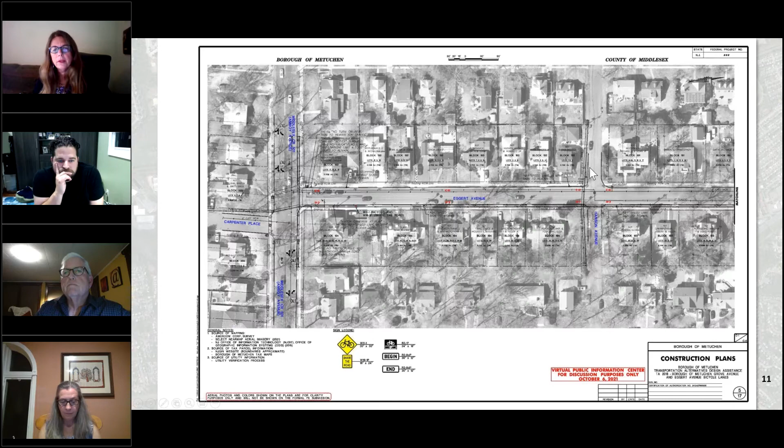Another two comments came in: we also have emergency vehicles traveling on Eggert Avenue and Grove—will Eggert Avenue be painted with bike lanes? No, on Eggert Avenue we couldn't fit that, which is what Mike had the drawing up for. So that's going to be what we're calling the sharrows, or pavement markings—there's not a dedicated bike lane along Eggert.

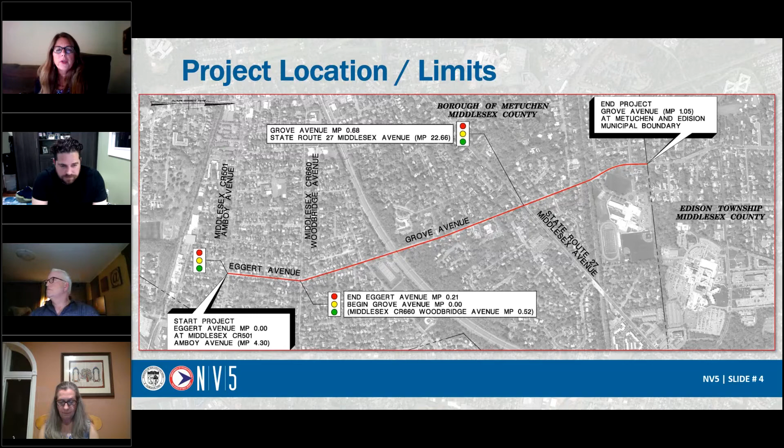On Eggert Avenue, the proposed improvements are going to be within the existing pavement. We're not proposing widening where we'd have to move curb and impact utilities and drainage, and potentially need right-of-way. What's proposed is shared lane markings within the travel lanes, to be installed on each side of the roadway. That image on the upper right is the type of pavement marking.

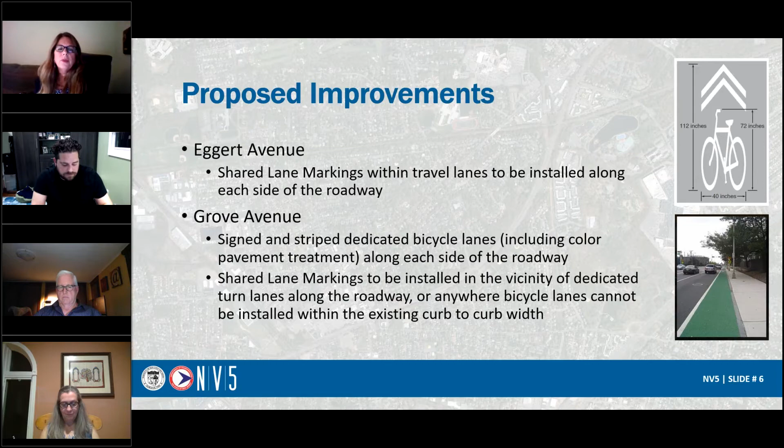Both of these types of treatments are really to alert road users that cyclists will be sharing the road, which is the image on the left, or, as we showed before, even the colored pavement.

Here, the image on the left is shared lane markings, which are proposed both along Eggert Avenue and areas of Grove Avenue. The image with the dimensions of the pavement markings is right from what's called the MUTCD, the Manual of Uniform Traffic Control Devices. The image on the right is showing actual pavement marking in this case on Woodbridge Avenue near Spear Street, just east of the Grove Avenue intersection.

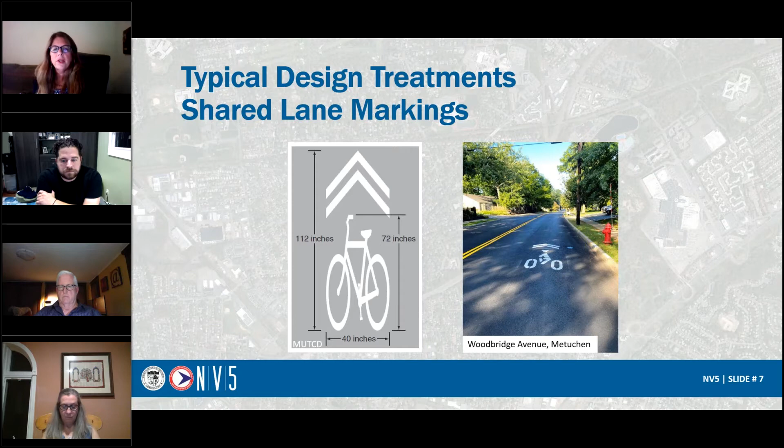This design treatment is just to show samples of bicycle lanes. The one on the left is Route 35 in Lavallette, New Jersey, and the one on the right is similar to what would be proposed here, which is actually a colored bike lane. Mike, maybe you could show with your cursor up by the car on the right — that pavement marking is actually within the colored pavement.

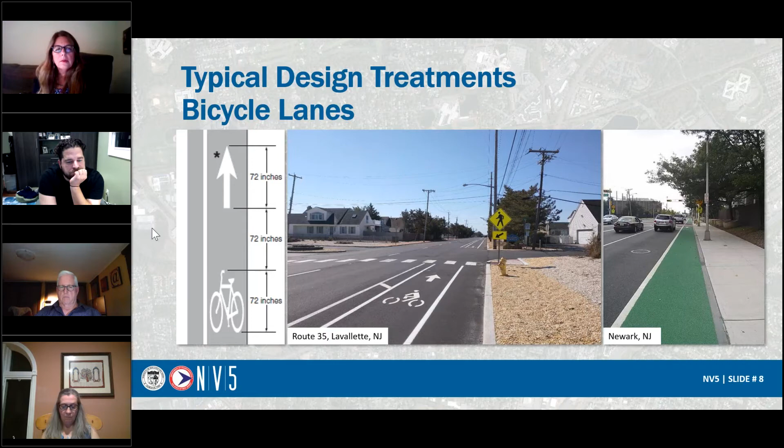At this time, I'm going to have Mike Keller actually go through our preliminary engineering progress print plans. These plans, the PDF of them, will also be posted on the website, and we'll just walk through the improvements on the plans before we continue the rest of our presentation.

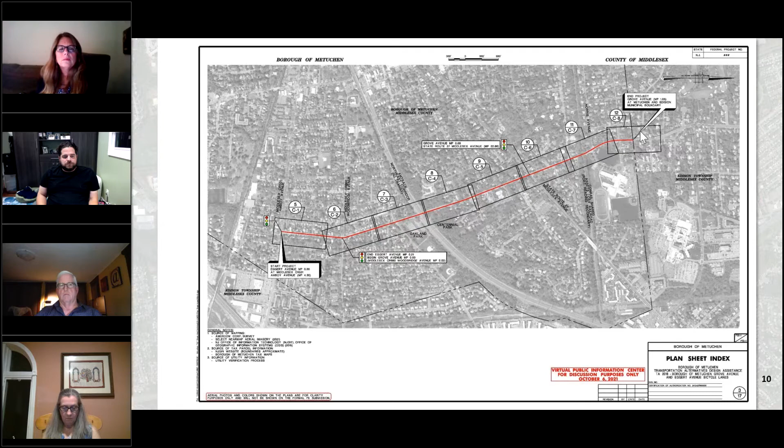Good evening, everyone. This sheet is the plan sheet index, and it shows the layout of the plan sheets within our project limits. So we start at Eggert Avenue and head along Grove Street, or Grove Avenue, up to the municipal border.

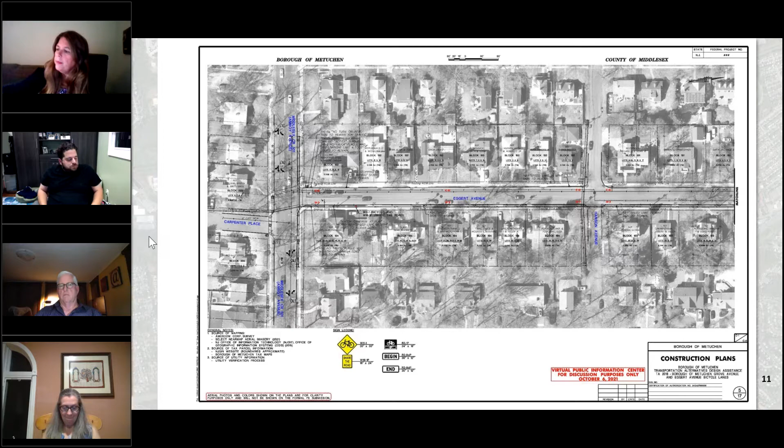For construction plan 1, this sheet includes the beginning of the project along Eggert Avenue, starting from Middlesex County Route 501 Amboy Avenue and heading north towards Hanson Avenue. The proposed improvements include shared lane markings, shown in red on the plan, due to the existing width of the roadway. Signage along each side of the road will be upgraded to include shared the road signs, shown in the lower left-hand corner of the screen. This project will be constructed within the roadway and the public right-of-way with no anticipated impacts to properties or existing utilities.

For construction plan 2, this sheet continues along Eggert Avenue towards the intersection with Middlesex County Route 660 Woodbridge Avenue and the start of Grove Avenue heading towards New York Avenue. The proposed shared lane markings continue up to and through the intersection due to the existing width and the presence of dedicated turn lanes on Grove Avenue. Following the intersection, the proposed improvements include 5-foot wide dedicated bicycle lanes with color pavement treatments, shown in green and red on the plan.

For construction plan 3, this sheet continues from an area north of New York Avenue, past Oakland Park, and heading towards the Amtrak Railroad overpass. The dedicated bike lanes and colored pavement treatments continue.

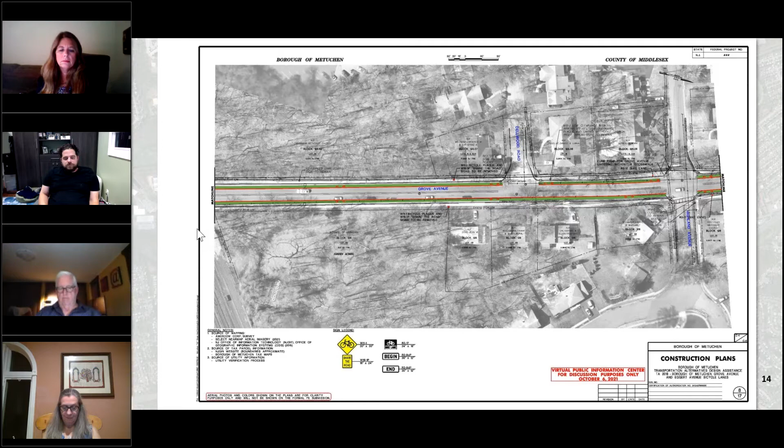For sheet 4, this sheet continues from the Amtrak overpass heading towards Highland Avenue, and the dedicated bike lanes and colored pavement treatments continue.

On sheet 5, this sheet continues from north of Highland Avenue, heading towards Woodside Avenue. The dedicated bike lanes and color pavement treatments continue. Due to the presence of a curb bump out at the corner of Grove Avenue and Woodside Avenue, right here, we're proposing to restripe the existing double yellow center line stripes so the proposed bike lanes can maintain a minimum of 5 feet width in the area.

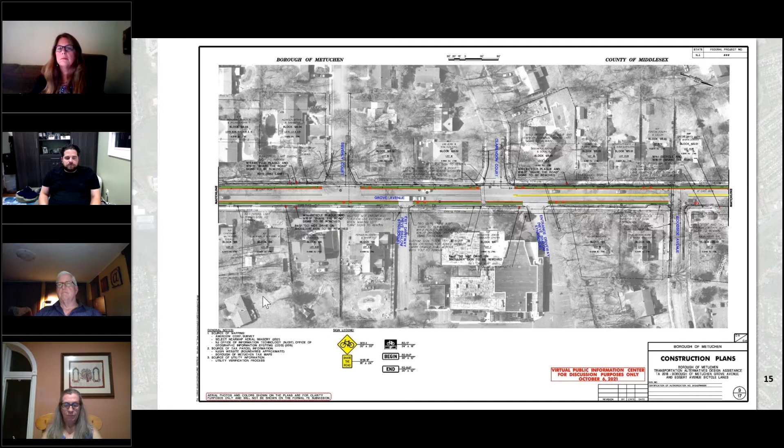Following Woodside Avenue as Grove Avenue approaches Route 27, Middlesex Avenue, the bike lanes heading north end due to the presence of dedicated turn lanes at the intersection, where the yellow shared lane marking symbols begin.

For this sheet at Route 27 and Middlesex Avenue, heading towards Stoneham Place, as previously noted on the last slide, due to the presence of the dedicated turn lanes on Grove Avenue for Middlesex Avenue, the dedicated bike lanes and shared lane markings are proposed. Following the intersection, the dedicated bike lanes continue heading north.

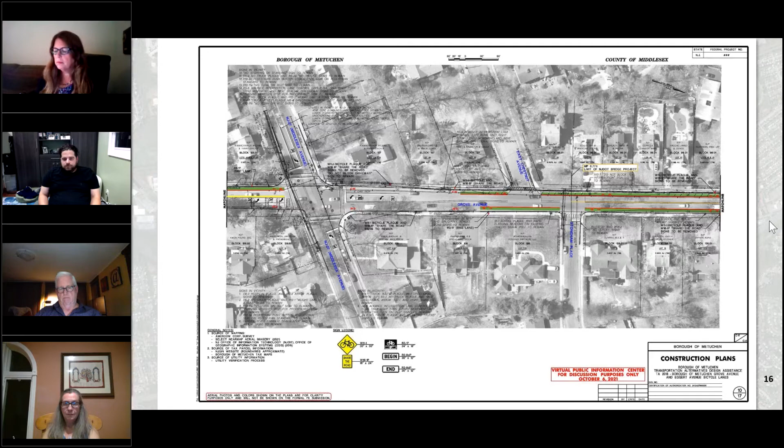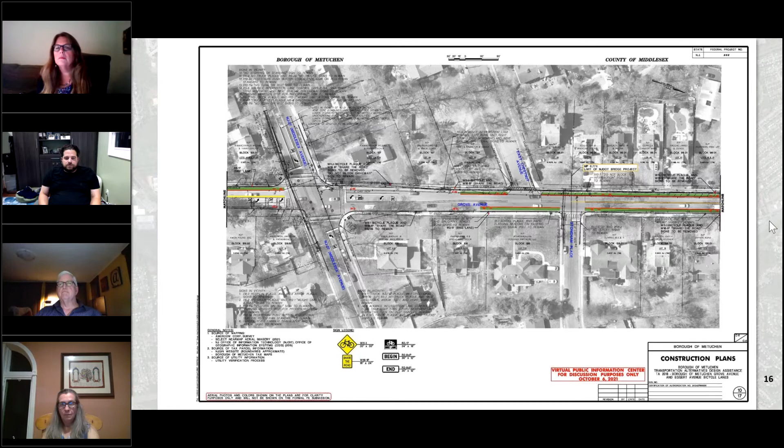As for Stoneham Place heading towards the Conrail Railroad Bridge, a separate NJDOT project is present within the project limits from Stoneham Place to north of the Middlesex High School, or Metuchen High School, parking lot at milepost 0.99. This includes a bridge replacement project for Conrail, Port Reading Secondary Railroad, and we are in coordination with NJDOT for the project.

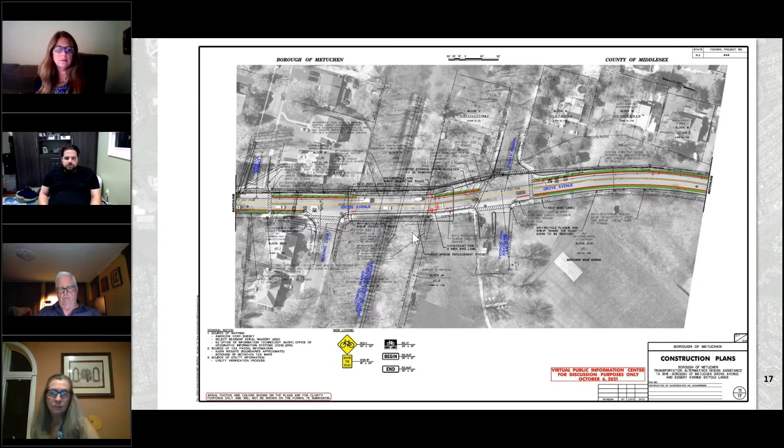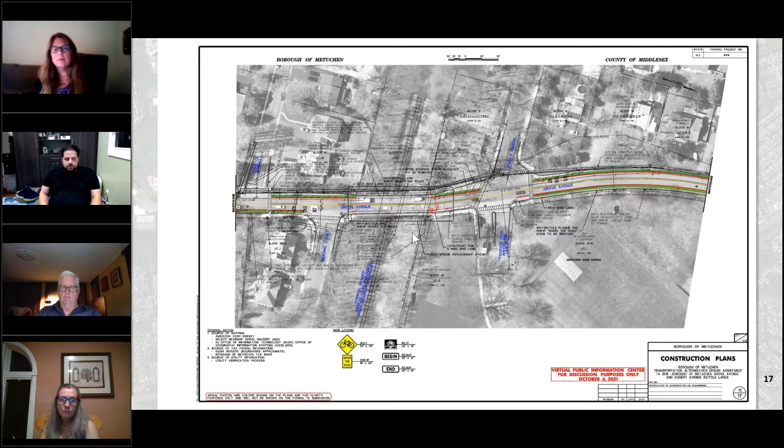For construction sheet 7, this sheet continues from Crystal Street to an area north of Metuchen High School's driveway. The proposed improvements include dedicated bike lanes with color treatments, with exception for the Port Reading Secondary Railroad structure, which due to the existing width will have shared lane markings proposed. As previously noted, the separate NJDOT project will replace the structure and include a wider typical section, which includes accommodations for bicycle lanes.

For construction plan 8, this sheet continues from an area north of the Metuchen High School driveway, heading towards Mason Drive and the Metuchen municipal border. The proposed improvements include dedicated bike lanes with color treatments that end at the municipal line.

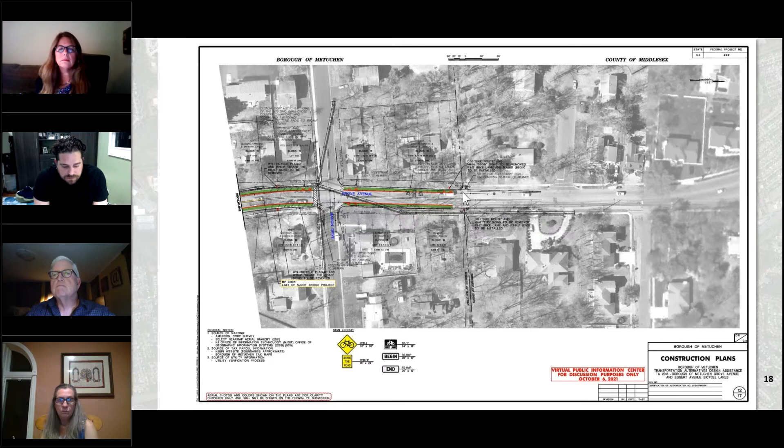Thanks, Wayne. So this project, as you said, is using federal funds. Any projects that use federal funds will go through an environmental document process. The type of environmental document for this type of project is a CED, or categorical exclusion document, that gets prepared by NJDOT, Bureau of Environmental Program Resources, and NV5 will provide information to them for that.

It addresses everything, or any potential environmental issues, from deforestation, which we're not going to have tree clearing, cultural resources, which we're not impacting, ecology, threatened and endangered species, wetlands, air and noise, hazardous waste, public reaction similar to this public information center, and socioeconomics.

And environmental permits. Since we're not proposing to widen the roadway, we're not moving curb or drainage or utilities. It's really involving pavement striping and signage. Environmental impacts are not anticipated, but the document is required, and the approval of the document will be required to go to the next phase of design.

So our next steps, we're going to open up to questions and answers. This was our second presentation this evening. We're going to compile all our comments. There'll be a 2-week comment period, and we'll compile comments and responses. We'll complete the PE, or preliminary engineering plans. NJDOT Environmental will complete the CED document, the categorical exclusion document. And then we can finalize, once that CED is approved, we can finalize the preliminary engineering phase.

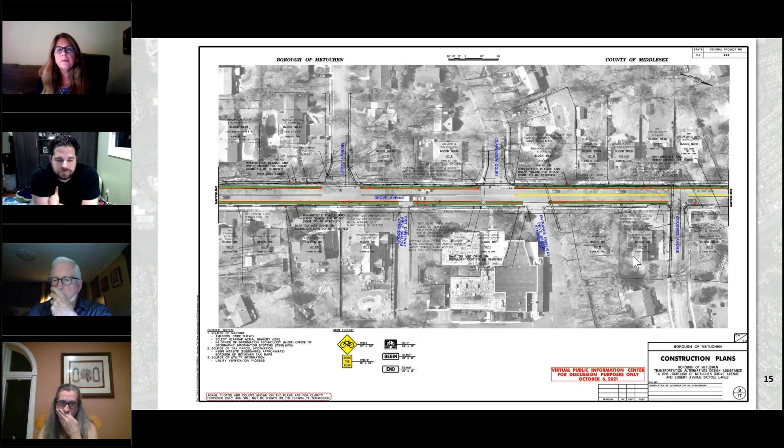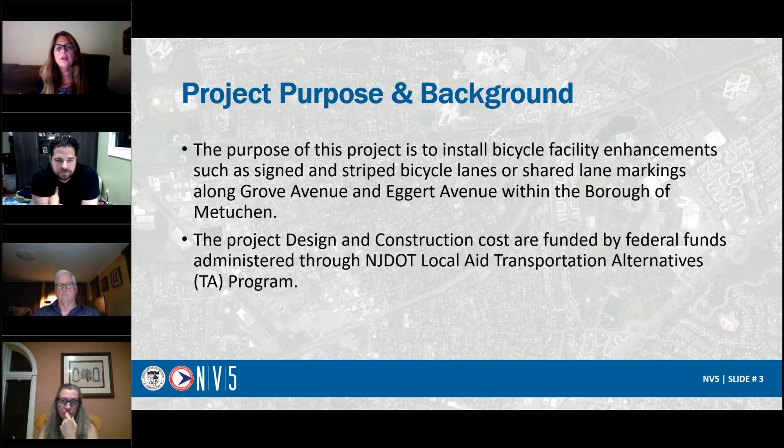If you go to the pictures in the presentation, I think it's slide 3. Yep, go back to the one with the photos. I'm sorry, slide 5. So what we're proposing now is on Eggert Avenue, sharrows, or pavement markings, alerting motorists that they can anticipate cyclists in the road. And on Grove Avenue, where we can fit it, a dedicated bike lane. The comment that Mike read was, well, can't you put in protected bike lanes? We just don't have the room for that, for what's required. I don't know if the borough wants to talk any more about that, but it's really beyond the scope of this project.

See the data from this study, and the attendee provided the URL, which we'll include in our notes. Okay, there's also another comment.

So it is not possible to deviate from the current iteration of this bike lane project, to explore some other way to have protected bike lanes with the two-way lanes? Well, what we're saying is that the scope of this grant wasn't to provide protected bike lanes and to move the curb, drainage, utilities. The grant money could not accommodate for those improvements. We can't go back to DOT and say, oh, now we want to do this. This was a grant back in 2018.

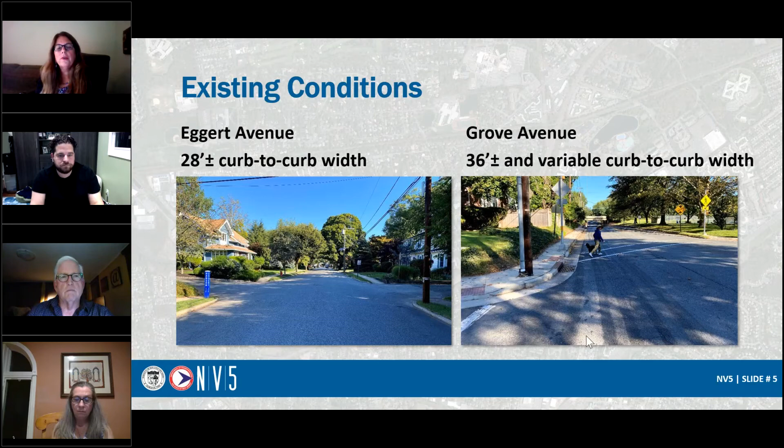Another question came in: does the plan consider school buses running along Grove in terms of the remaining width of the road? If school buses stop now to pick up students right on the road—someone had a question earlier about emergency vehicles too. If there's a disabled vehicle temporarily parked until it's towed, a cyclist would have to go around them. Are there bus stops right on Grove Avenue?

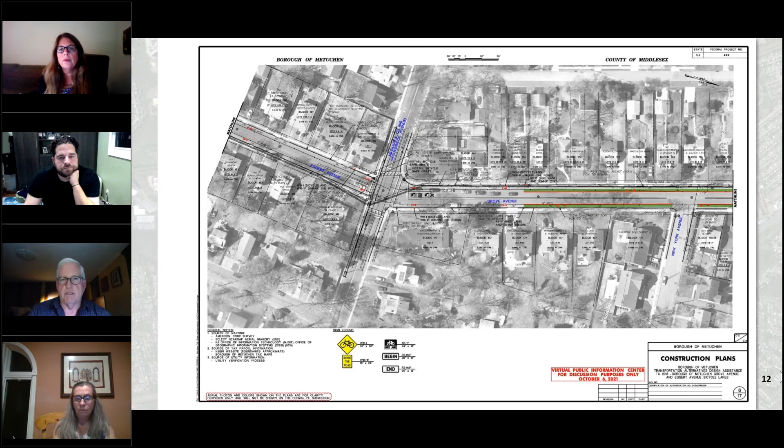I think that's what their question is, if there's a bus stop there. It looks like they said yes, school bus stops. School buses obviously take Grove to get to the high school. I think they meant if they physically stop on Grove Avenue to pick up students.

Yeah, but there would be no change in that. I mean, I think it was questioning the width of the road. We're not changing the width of the road, but I thought their question is, can the school bus stop in the bike lane? Maybe I'm misinterpreting their question—if they could just clarify. We're not widening the road.

They just said yes. So it seems more of a question about the typical section, which is going to be 5-foot bike lanes and at least an 11 to 12-foot through lane. It seems like it's a question about buses stopping in the bike lane to pick kids up. We're not proposing to change any of the school bus stops for stopping and picking up.

Let's see. They said thank you. All right.

Another comment came in: could the borough fund bollards through their budget in the future to protect this lane? I'll look to Jason and Linda on that one. I think it's beyond just the funding issue—it's can you fit them? So even with the bollards, there'd be a question of how many you're going to place, and if you can physically fit them without taking away from your minimum travel lane.

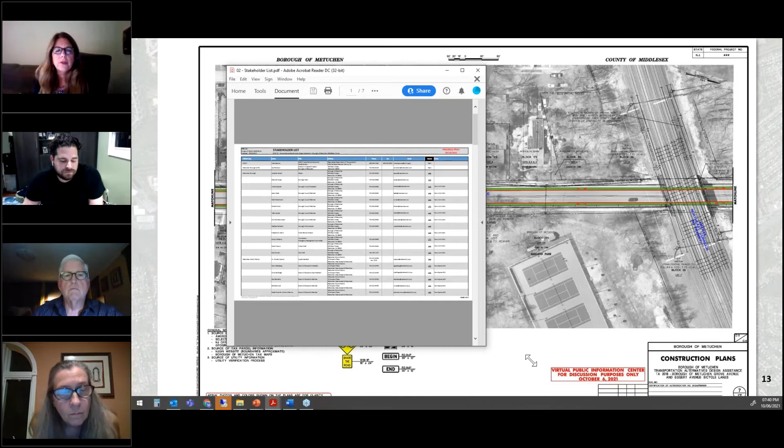What was their total tally? 50 stakeholders, 274 unique property owners. So those people all got a letter. The person who asked the question may have gotten a letter, or they may have seen a public notice. The meeting was well advertised.

We're in preliminary engineering. There will be another public information center also in the final design phase. That's a requirement for federal projects. But yeah,

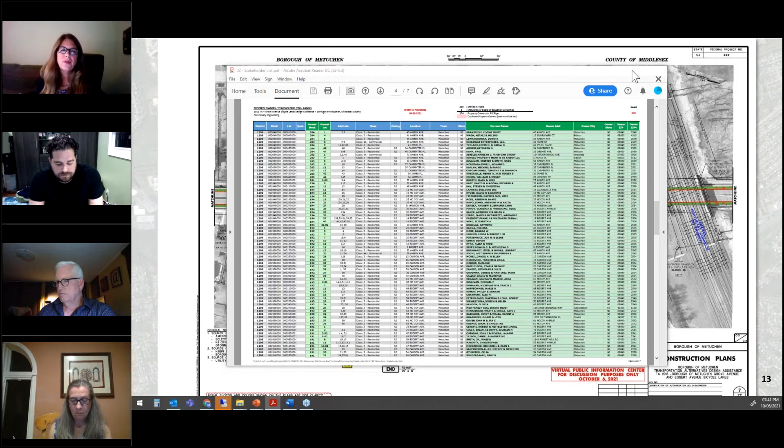Some people just choose not to participate. Sometimes we find that if it's what we call a quality of life or a good project, people hear about it and they say, okay, that's great. And they're not necessarily going to attend a public meeting. If we were widening the road or doing something where it's going to impact adjacent property, you tend to get more participants.

One of the attendees said, Thank you all. Have a good evening. Likewise, thank you.

Actually, we've conducted, Mike and I together, several virtual meetings. We had one municipality in northern New Jersey that did want an in-person public information center. But we found in a lot of cases we get more participation when they're videotaped and then posted. People will, like we said, come at their convenience and watch a video. So there's been some pros and cons.

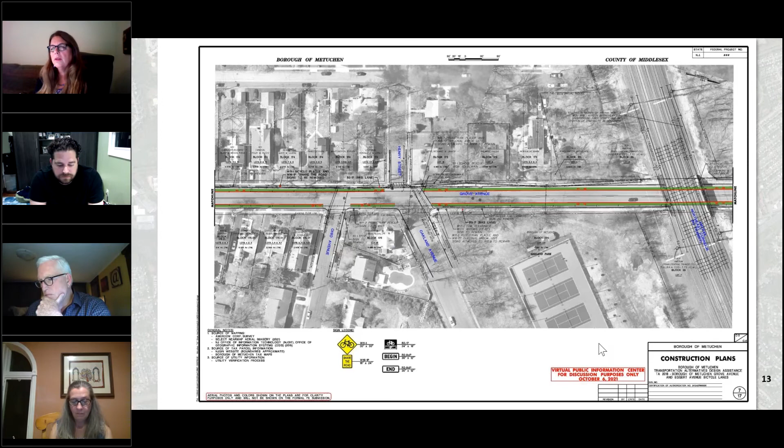So Jay, if anyone does decide to call you, we always include that option. If they do decide to call you, we just ask that you send us an email and let us know what their question or comment was. Obviously, if they email you a question, you could just forward us the email, or if you respond to them, either or. I'm sure there'll be, depending on the question, something that you guys may have to answer versus, but you'll definitely see every question.

Yeah, we have to, right. For the public record, we need to see them. Sometimes it might be something that's not part of the project, but we just ask that you provide them for us, because we provide the summary and that actually becomes part of the environmental document. The Public Information Center summary and the comment responses become part of the environmental document.

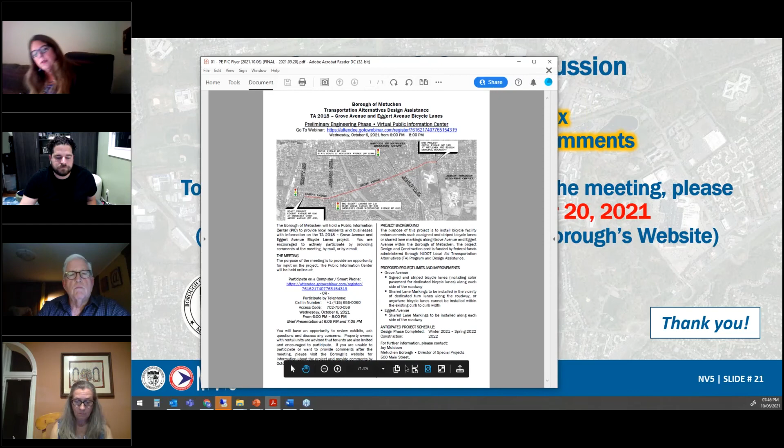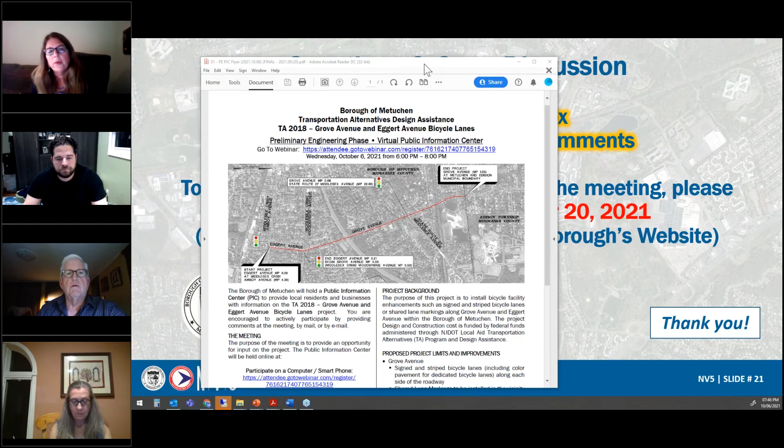Yeah, Mike's pulling it up right now. When we said people received letters, they received the flyer that Mike has there now, so we could post that on the website. That was sent to people living on Grove as well as within a certain number of feet. It's 250 feet from the project. So what Mike has up there in red is the project limits, and they got a letter.

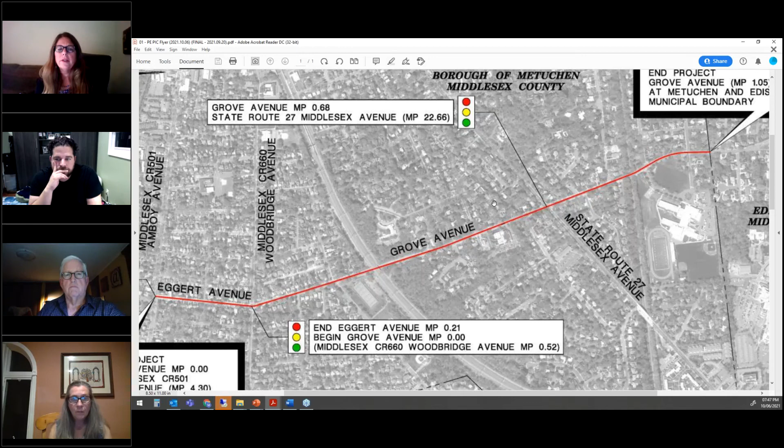We got their address information from Metuchen and sent letters to them. In addition, there were public notices, and there was a note on the website. So when we said letters, it was the flyer, the meeting flyer. So yes, we could post that if it isn't already.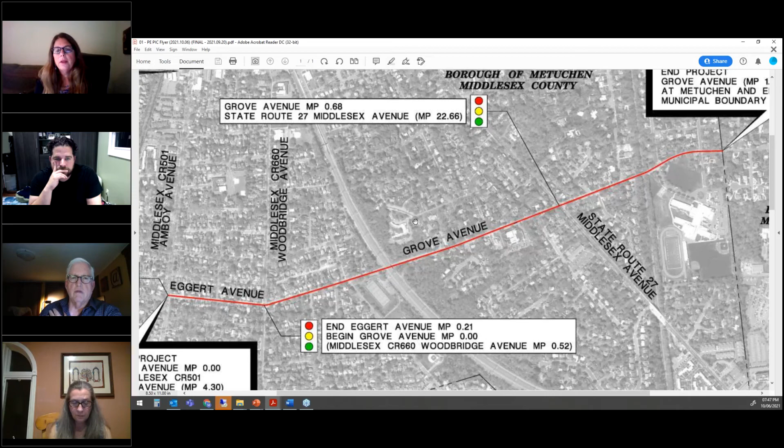If it is, I think we need to put a little explanation, because if you just put this up there, someone living elsewhere in town might say, 'Whoa, I didn't get this, what's going on?' And we all know how some people can carry on about that.

This was sent specifically to residents and property owners within that vicinity. I don't know where, but your legal notice had the same information, so it was posted in the paper. It's also been on the borough website for certainly over a week now.

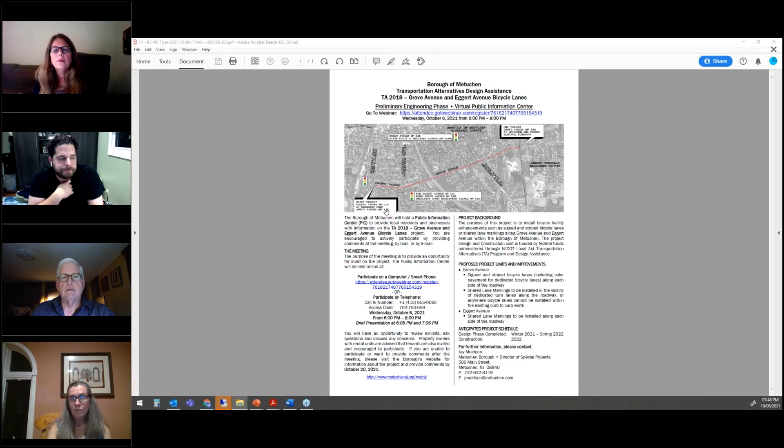I may have used the term 'letter' and they thought everybody got an individual letter. What they got is the flyer. In addition to those property owners, we identified the school and other stakeholders — there were 50 other stakeholders in addition to adjacent property owners. And the letter does ask property owners to inform renters if they have them, or if it's a business, to inform them as well.

So we'll stay till 8 o'clock. Like we said, we got some great questions and comments, and we'll be preparing a summary that'll be posted.

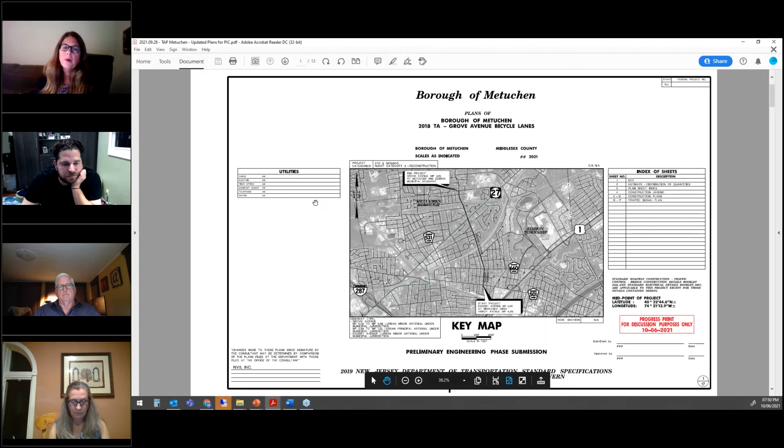Let's see, four comments came in. Will any homeowners lose the ability to park in front of their houses? Great question — we checked that and looked to see where there was access. You won't be able to park in the dedicated bike lane. On Eggert Avenue, if there's parking there now, it'd be fine. So you won't be able to park there, but we did check that there was access to each of the residences, either a driveway or rear access.

Then there's a question for Jay: what is the status of signage with this project? Denise, I think you can answer this. This may have been a question we got before the presentation, where somebody said don't contribute to sign clutter. There will be signs, and they are required.

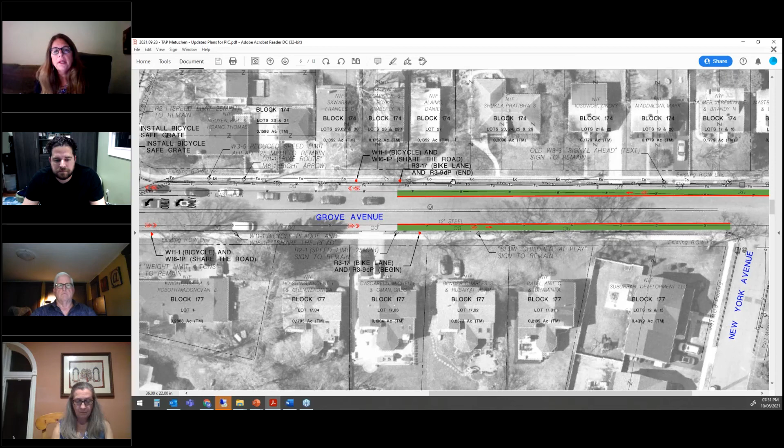What we talked about is the MUTCD, the Manual of Uniform Traffic Control Devices. We want to alert motorists that there are cyclists in the road or in the bike lane, so there will be signs required per standards. We're not going to compromise the standards and put fewer signs because of sign clutter, but there won't be an overabundance of new signs if that's the same person who asked before the meeting. If not, or if I didn't answer your question, please rephrase it.

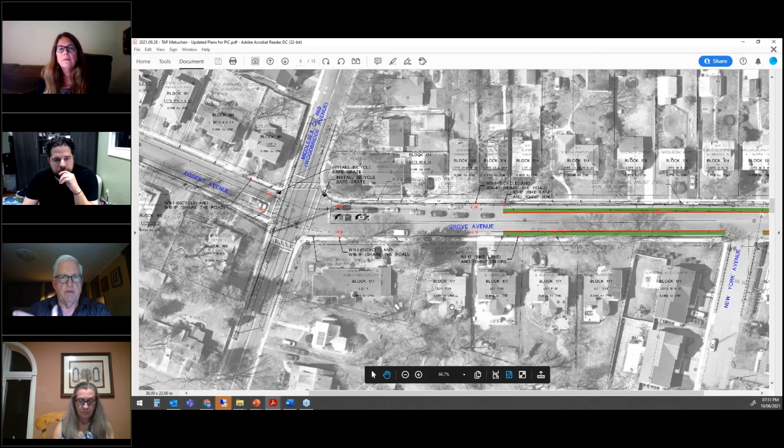So I think we're going to do what's required, but to me that would be the minimum — we don't want to create clutter, but there are standards and requirements we have to meet.

So what Mike just zoomed in on is what the signs would look like. Where it's sharing the road, there will be signs indicating bikes sharing the road, and where there's a bike lane, it'll have beginning and ending bike lane signs. And obviously where there's an intersection and somebody's coming from a side street, when they turn on they'll see a sign indicating there's a bike lane.

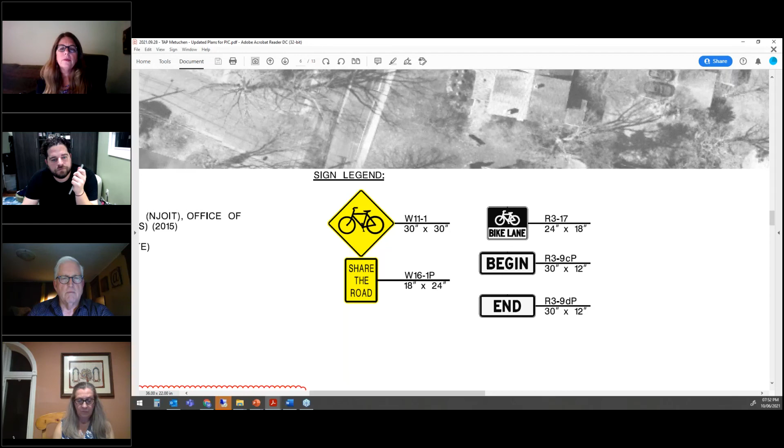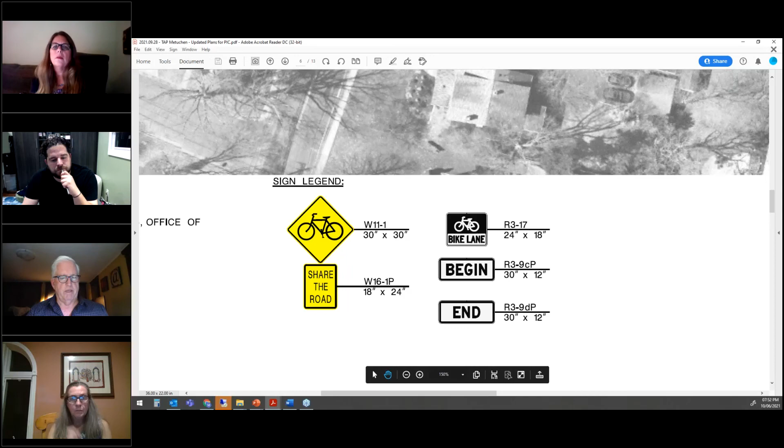And Denise, is it correct that as we move into final design, the quantity of signs will then be known? In the plans that are available and will be on the website, there's a page with distribution of quantities. Will that be populated at that point? Yeah. We probably already have an approximate number of signs, but we could do that.

A resident or stakeholder's concern was that they felt there was a lot of sign clutter already, and now you're putting in another facility and adding what they considered unnecessary signs. As designers, we have to meet the requirements for the required number of signs. This is a safety improvement project, and we're not going to compromise on that.

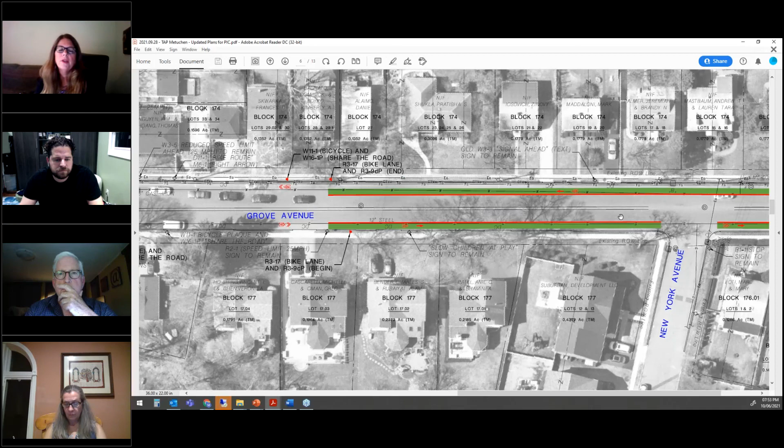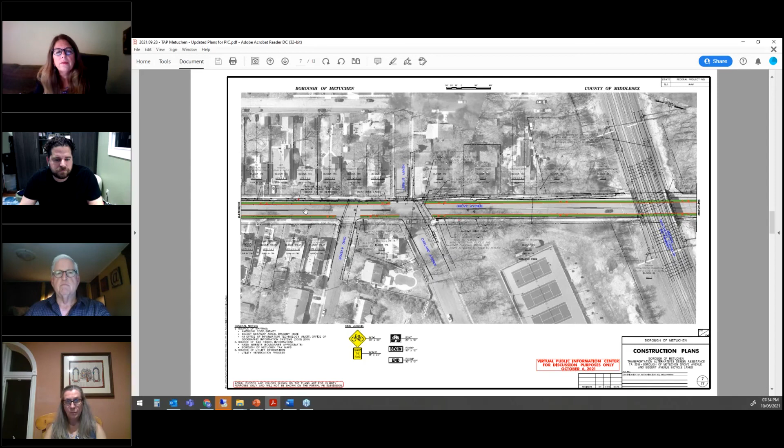I think it might be 100 feet between signs. Mike, I don't know if we finished tallying them all up, but we could get that information within the next 2 weeks and put it as a comment response. If you could provide the type of sign, quantity, and zoom in to show the symbols of where they're shown, we can provide that information.

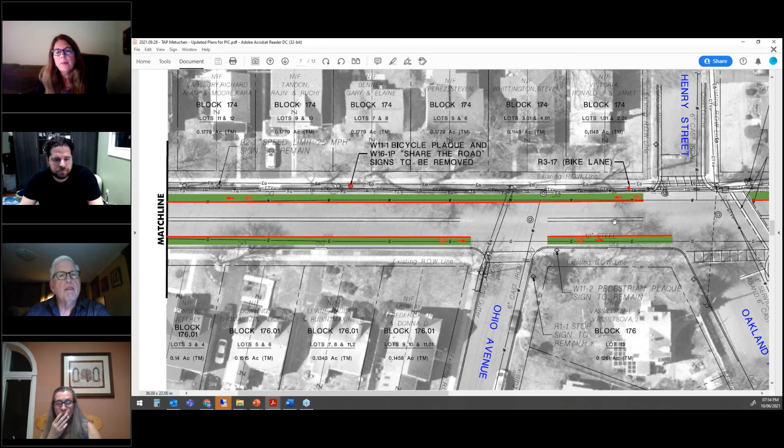Oh, it looks like another follow-up. Let's see, 100 signs were placed out over 20 years ago. So what they're saying is there were over 100 signs placed, and they could mean all different things—maybe parking regulations or this or that. I'm not sure if the borough has a sign inventory. As far as this project, we're going to be proposing the signs that are required for the proposed treatments.

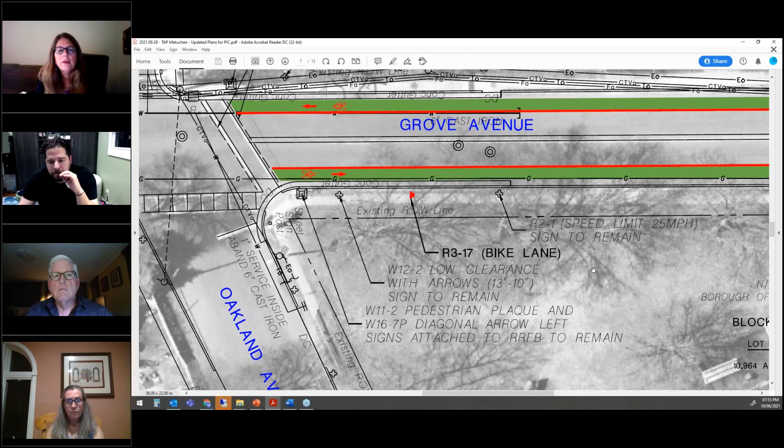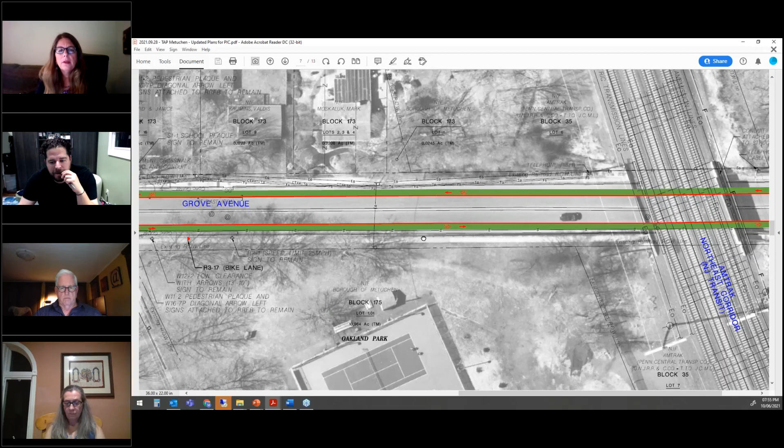As Mike zoomed in now, there's a legend on each sheet, and that one's showing that there's going to be the bike lane sign there. When you go to the website, you'll be able to zoom in similar to what Mike's doing now, because it'll be a PDF. If there's any questions, just get the questions through Jay and we'll be able to answer them.

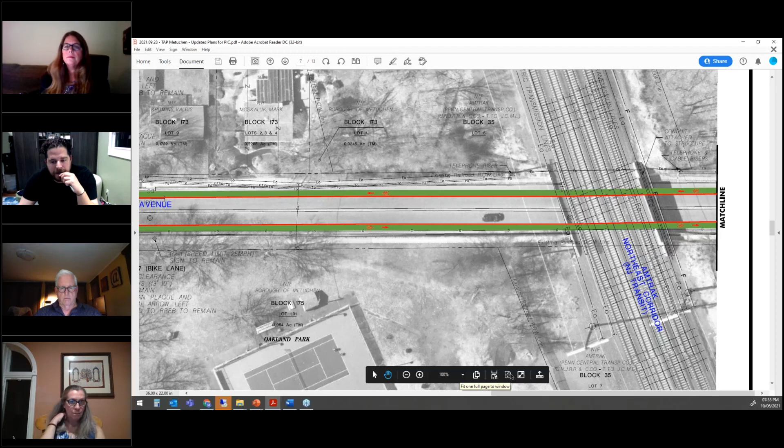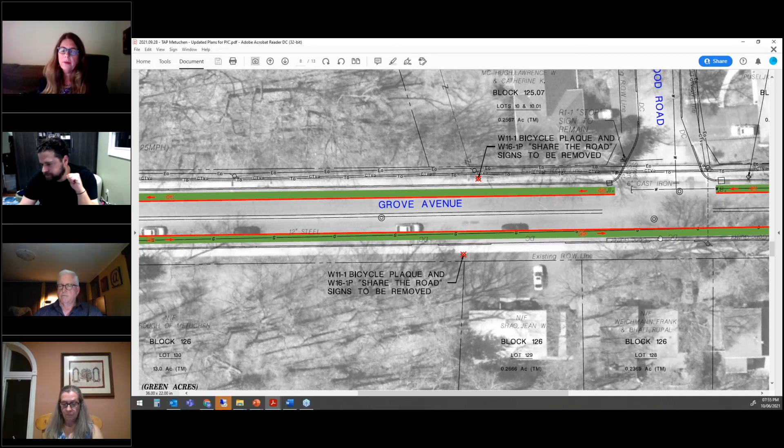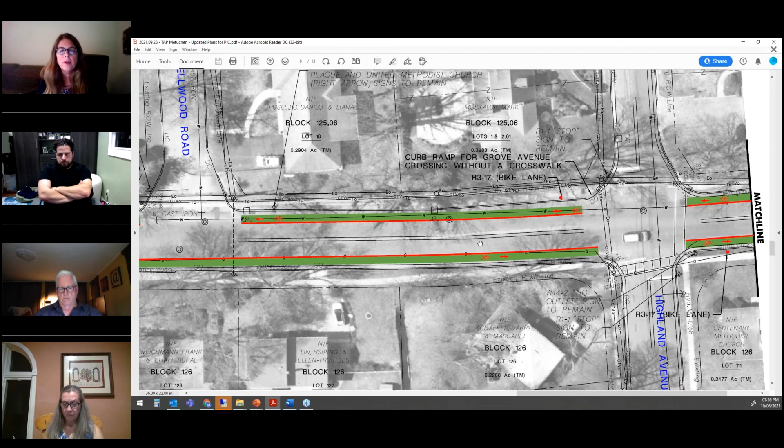If that attendee feels there's some unnecessary signs that are not regulatory signs, it's not part of this project, but if it's an old sign that's been up there for years and perhaps no longer applicable, just let the borough know. We recently did a sweep on Main Street, removing some unnecessary, faded signs. We need to continue to do that, so between now and implementing this, we can remove any unnecessary signs.

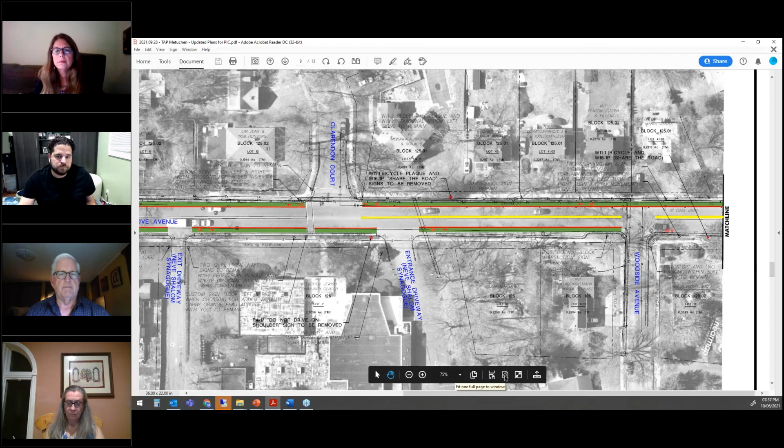Well, we've got about 3 minutes left, so if you have your questions, keep providing them. It's been good—sometimes we're waiting, staring at each other for 20 minutes to get a question. We appreciate all the great input. There is one more comment.

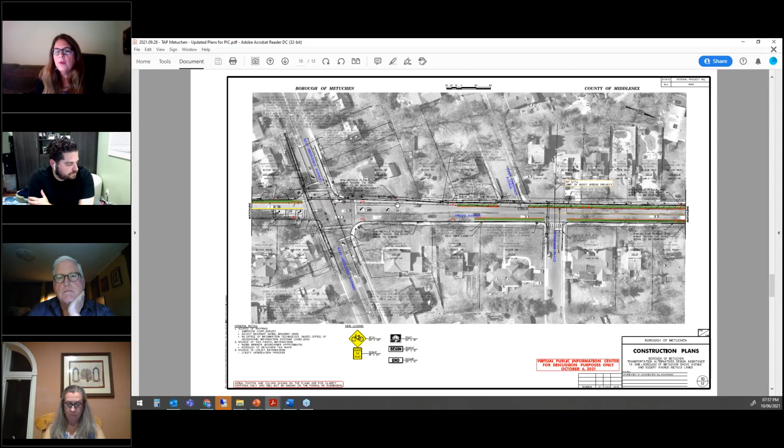A failed bike lane was attempted 20 years ago. 100 signs were placed out on Grove and Woodbridge—not again. That's more of a comment than a question, so we're piling up comments.

The comment period will be open for 2 weeks. The reason is for all our federal projects we do a 2-week comment period, and we have to put an end date to it so we can wrap it up and get that information for the environmental document. We'll be taking comments through October 20th. Please submit comments through Jay Muldoon, the project manager for this project and director of special projects. His contact information is on the screen.